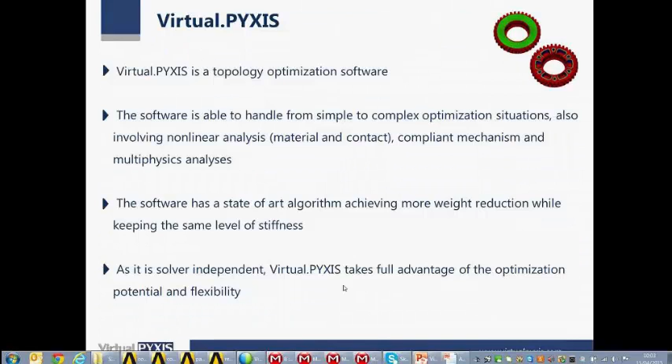As for where we've been working, we have an office here in Chicago, US, the place where I am. We also have an office in Hanover, Germany, and a relationship with Virtual CAE in Brazil, which is our subsidiary in South America.

Here in Hanover, our office is in a place called Wissenschaft Park, which is a technology park. And Chicago is inside the Illinois Institute of Technology, also a technology park.

We are also an ANSYS partner, so later I will send this presentation to you, which is not confidential. If you go to the ANSYS website, under software partners you can see that we are developing something ANSYS recognizes, something that gives value to ANSYS. So we are partners in this development together.

Let's talk a little about the main advantages of the software. In this presentation today I'm focused more on ANSYS, so that's why I say just ANSYS. In this case, we use the ANSYS solver during optimization cycles.

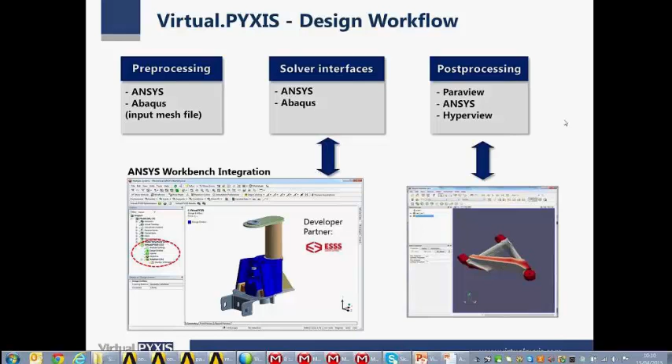So here are some models, just to understand a little bit more the applications of the software. Everything I show here is not confidential, so just to understand a little bit more.

Here is a Cummins model. It's a truck engine mount support. It's nice because when you start the optimization, you go from this extended design and get something like this at the end, also with the validation. I'm talking here about 23% weight reduction. The result of the topology optimization itself is like this one.

After that, of course, you have to go to the CAD again, and there are some ways to try to get shorter time to prepare from this part to the final part. For example, in ANSYS version 16, we have a module called SpaceClaim, now part of ANSYS. It's a CAD software for preparation for simulation and also post-processing, in this case for topology optimization. SpaceClaim takes this model and tries to get the final model as soon as possible, joining some surfaces and repairing some corners. It's a very nice tool, because most of the time people are complaining about getting this result to the CAD interpretation as a final result.

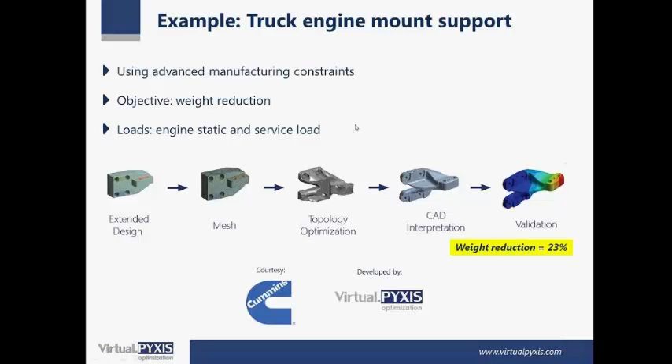Here's a different example, a gear model, showing symmetry—in this case rotation symmetry—and extrusion, using pattern repetition around the model. Here we use polymer, which most of the time we think is like cast steel or aluminum that can be optimized. It depends; it can also take care of injection molded models. In this case we are talking about polymer, working with all the loads normally acting on this gear. This is the final design, with 35% improvement compared to the baseline model.

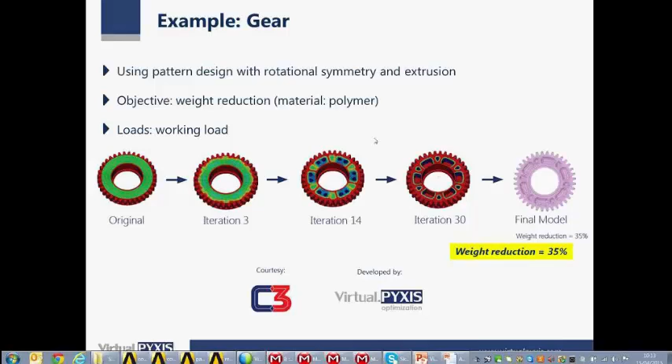Here's also a nice example from AGCO, which we worked together on. This is taking care of the nonlinearity of the situation, because this is an analysis of ROPS, the rollover protection simulation of this structure. This support comes in the front part. So we start from this and we get this. The idea is to try to get homogeneous reactions for all the loads.

That's important—most of the time you think optimization is just about weight reduction. But in this case, this is the original model, and from this model to the optimized model, we actually have more weight here. But with the optimization, we can distribute in a better way all the reactions for the loads, which is good for the attachment between this support and the transmission. So it's not always about weight reduction, but also solving a specific problem that can be very difficult to design by ourselves, even as expert designers or engineers.

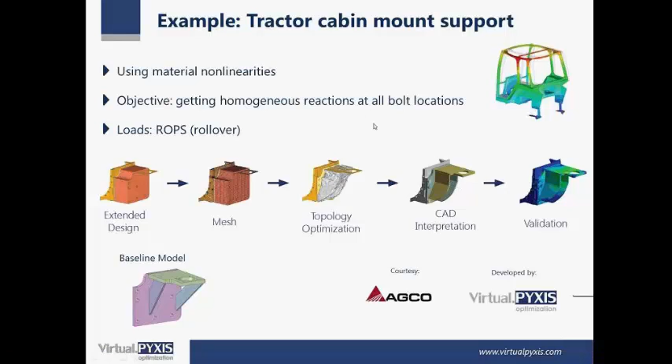Here's also a nice example from ThyssenKrupp. This is a model called the pinless project, where there is no pin on this assembly, just the con rod and the piston. In this case, we would like to control the situation. Most important for the optimization is, of course, compression and tension, but the tension load tries to displace this part to the left, and also this part to the right. So because they are trying to separate from each other under the tension load—going up and going down—the piston and con rod.

After the optimization with this new structure, it also works as a flexible mechanism. During the tension load, this part, instead of going to the right, goes to the left. This solves a problem, because there's a cylinder here, and if this part goes to the right it can be a huge problem about failure or something like that. So this is an important model also to talk about optimization.

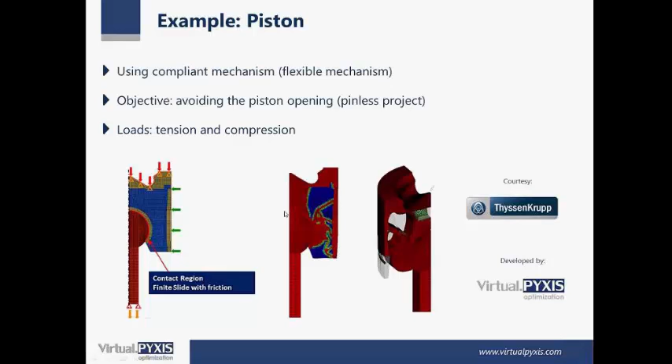Now I have some models to work with in ANSYS. The first model is for a nonlinear static analysis. This is a kind of model which is more or less the same size as a real model, with more or less the same loads as a real model.

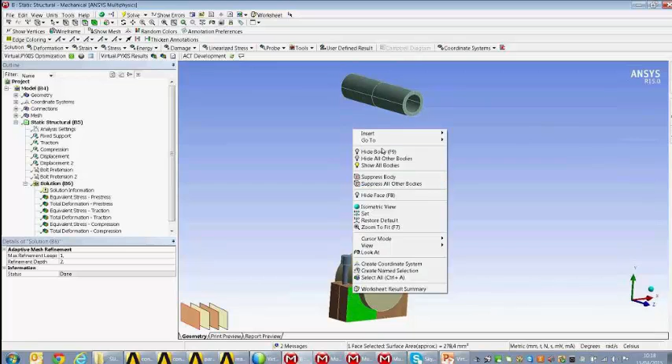Here we have an assembly of a con rod and cap. Here there's a pin, here is the bearing, and also here inside there are some screws which are tying together the cap and the con rod.

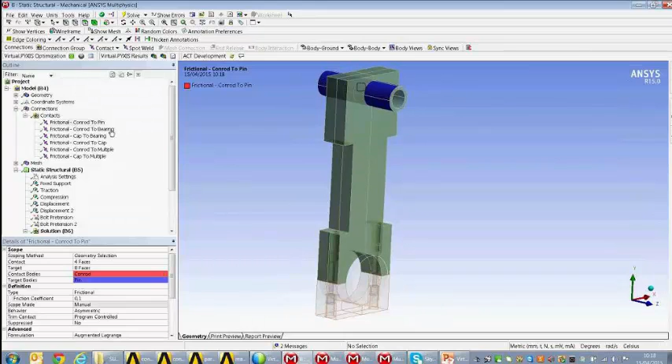Just to have an overview about this model, here we have the contact, for example the contact as a friction model. We are working here with 0.1 for the friction coefficient from con rod to pin. Also there's a contact, everything here is friction, just to summarize, using also every time 0.1 for friction coefficient. In this case, we are using the contact in between con rod and bearing.

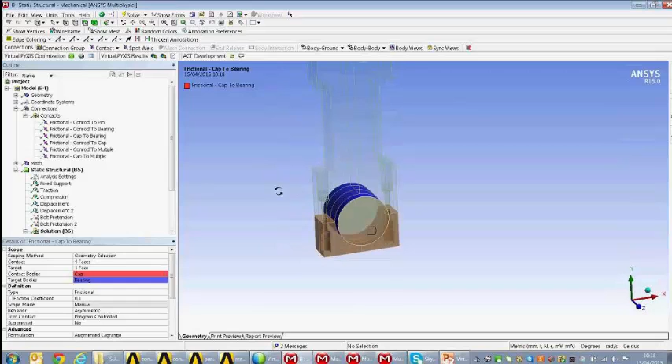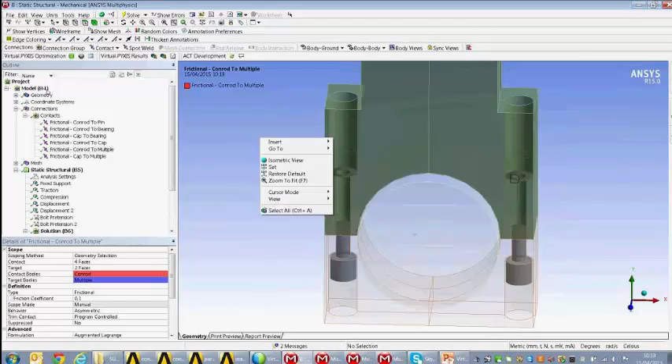There's also contact in the bearing and cap, and contact in between cap and the con rod, to prevent anything that happens in between these two parts. There's also a contact in this case, for example the screw to the con rod and the screw to the cap, internally to this part, to prevent the approximation of the head of the screw against the surface.

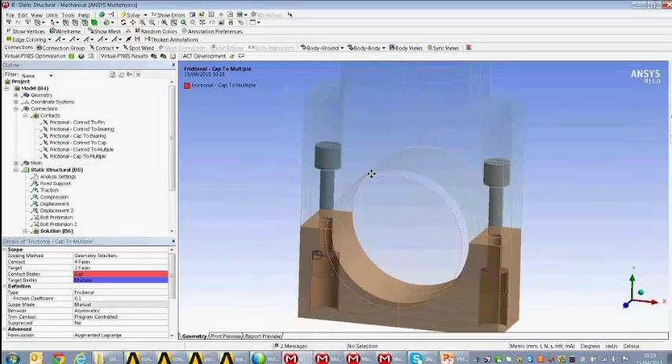So here is just to show the mesh of the model. This can be used - there is no restriction in ANSYS, or even perhaps in Abaqus, for the elements. Most elements you use during your structural analysis can be used here, even tetra or hexahedra elements, first order or second order.

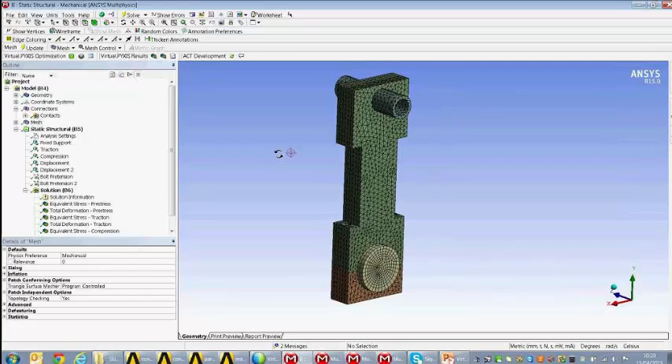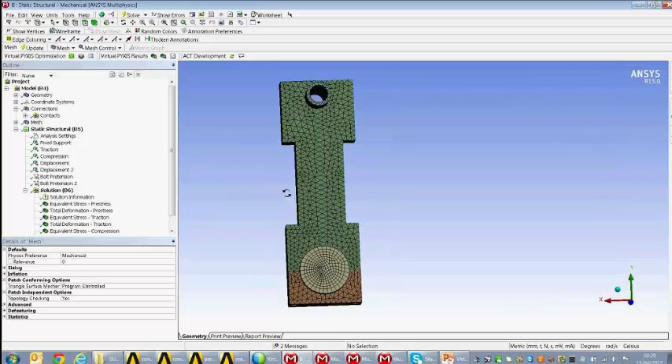For the optimization, it's the same idea as you use for a normal or standard simulation - the more elements you have, the better. Also, if you work with nonlinear or second order elements, you also get better optimization results.

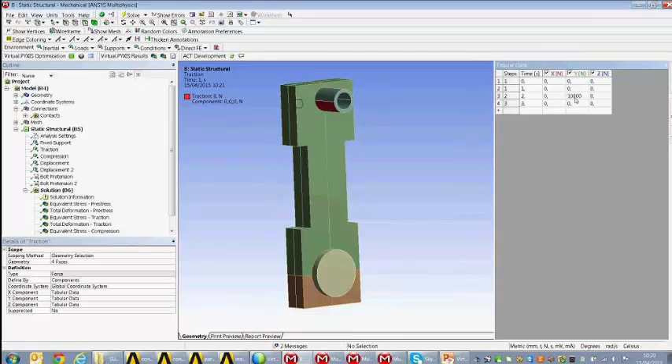So here in this case we have a situation of 3 load steps. The first load step is the case where we apply the pretension of your structure on both sides, and in the next steps you apply, for example, traction and compression loads. This case is compression, this case is traction load, and all the time applying in the pin, which more or less represents the contact in between pin and the piston. So here for compression, top part, and this part for traction load.

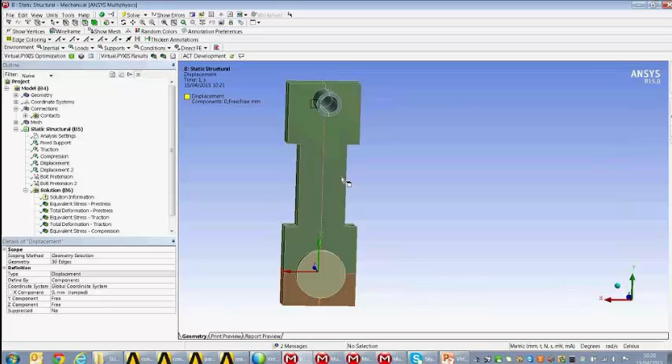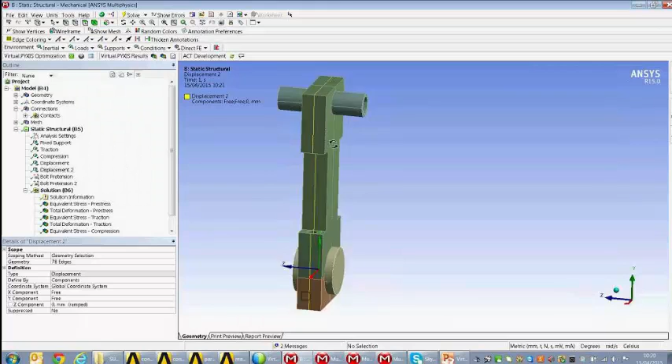Also, sometimes as the mesh is not 100% symmetric from both sides, and also sometimes to get an easier convergence of the model - in this case, as a symmetric model, we are just emphasizing the symmetry by controlling the displacement of the outside surface, which more or less divides the part in both parts from this plane and also from this plane. But this is more than the optimization - it's for more controlling the convergence of your nonlinear static model.

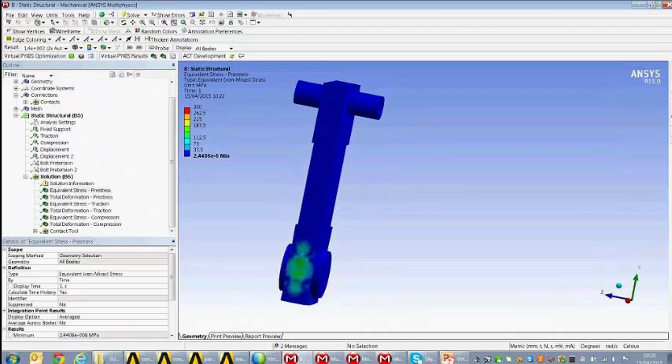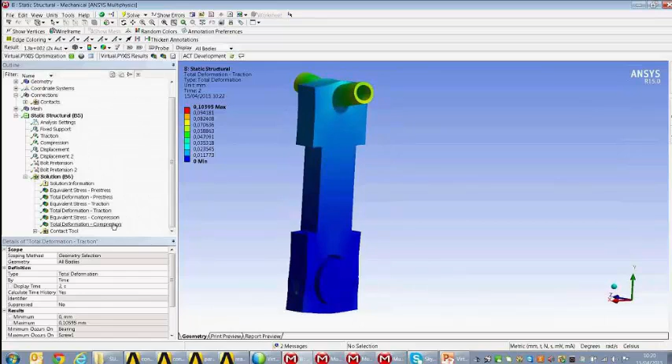And here we can see the results. For example, the pre-stress, which gives a higher stress on this region of the pretension. And also, for example, here you see the deformation in some scale - in this case we are using more or less 100 times more, to see how it works for the traction and how it works for the compression situation. And also here, for example, the stress for traction and the stress for compression.

So from here, now I can prepare the optimization model. When you are using, in this case, our software, you have just to go to ANSYS - perhaps who is working more with ANSYS ACT, which is the ANSYS Customization Tool. You have just to install your extension, a standard extension for that, and after that you just manage this extension, which in our case is Virtual.PYXIS.

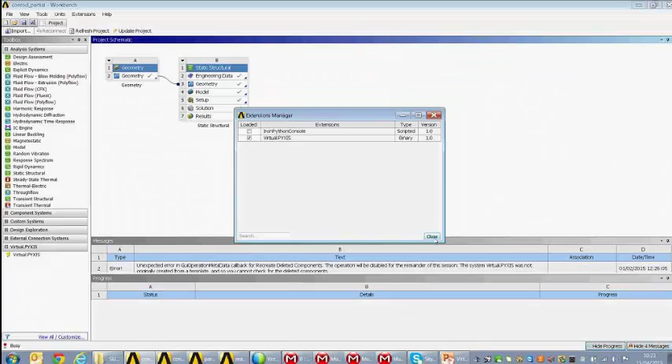When I check this part, you see here the optimization option. So you just go to drop this to your model analysis, and so, for example, here inside the ANSYS tree, now you see the preparation of your optimization.

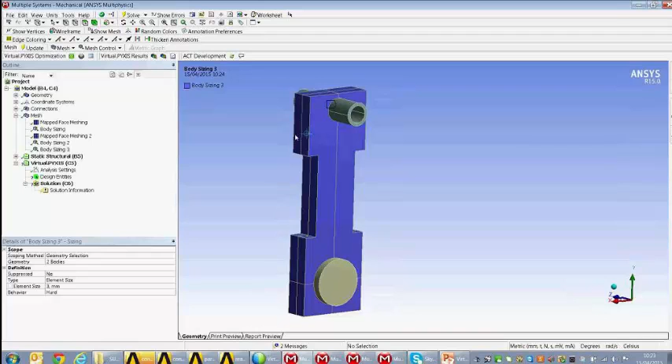For example, one recommendation that we normally give is that we see the element size of the part which you are trying to optimize. Here, we are enforcing 3 millimeters as element size. So in this case, you used to recommend 2 times as a minimal member or minimal radius for the optimization creation. Like, for example, the software - you control these minimal members as 2 times of the element size.

And also here you can see more possibilities of material law, filtering techniques, and some more controlling options. We have documentation where everything is well explained.

Something important when you are running the optimization: for example, here we can also use ParaView, as I showed you before, as a post-processor. You can also export the STL model here inside ANSYS, taking the last result of the optimization and creating this STL model inside the directory you're running.

And also you can use this MPI license of ANSYS. This is not the parallel processing of the optimization, but the parallel processing of ANSYS in this case. Since we're taking sometimes 20, 30, or 40 iterations, the time for the optimization itself is more or less 1%, or just a little bit more. So most of the time is ANSYS processing, and with this parallel processing we can speed up the solution using, in this case, 4 processors.

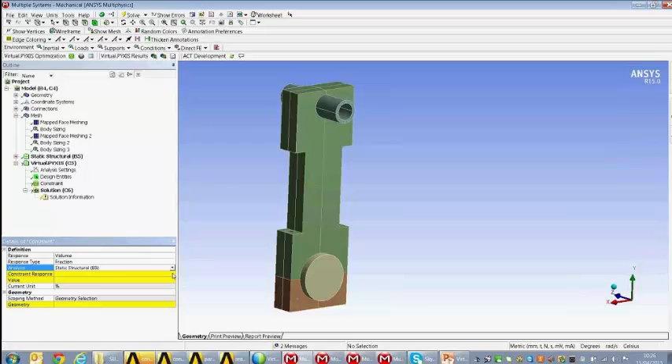Also, in this case, you want to control, for example, the volume of your structure, using the static structure analysis we have done before. And less or equal, for example, I want to reduce 65%. So I'm saying I want to keep 35% of the optimized model compared to the initial model.

So this is the part of the optimized model: you have just 35% of the initial model, again for these two, conrod and cap.

In this case, I need to create a load combination, because if you go back to the load history, the first load step is the bolt pretension, and the second and third load steps are related to traction and compression loads. So what we do here is create, for example, two lines: the second step, which is traction, and we can have, for example, weight. Weight here is not related to the structure, but the weight of the strain energy for the load step, second and third load step.

So here you can combine as many load steps as you have, and it's important because, for example, the compression and traction loads produce different strain energy in your model, and they don't act at the same time. If the loads acted at the same time, you wouldn't need two lines, just one. But here we're talking about different load steps, different times, so we have to create this load combination.

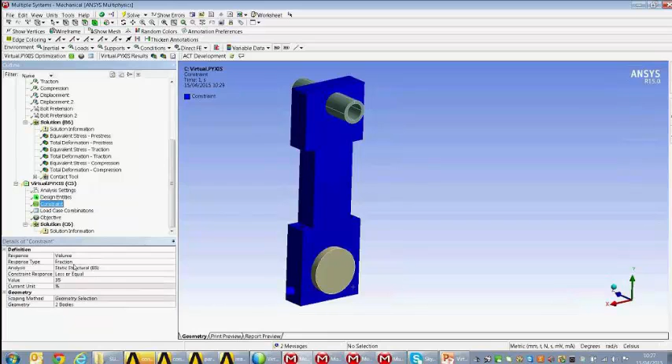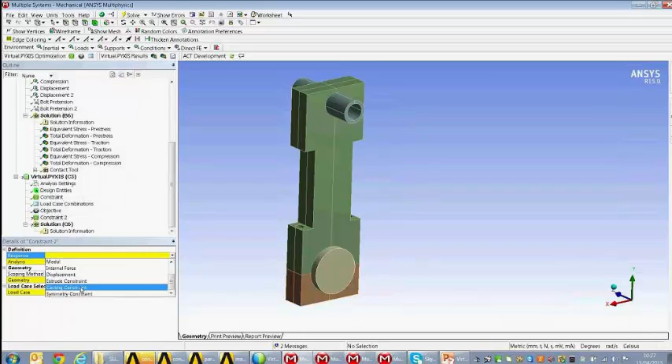Just to go a little bit more in detail about the constraint: here I also constrain the volume, but you can also control more things, including manufacturing constraints. For example, casting constraints, where you can prevent certain opening directions, plus more things about the procedure itself for the manufacturer. Everything can also be controlled here under the constraint - in this case, not volume but manufacturing constraint.

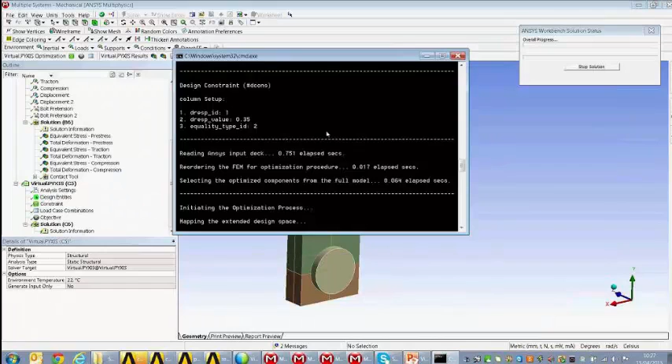So if everything is fine, I can start the solution here. Now you see that the optimizer will call ANSYS, running ANSYS, and also calling the MPI license for this case.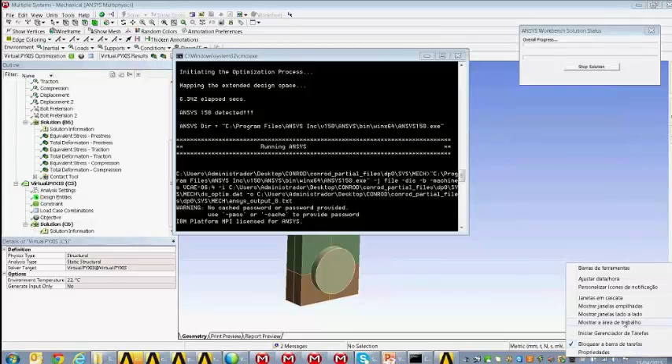So when I go to the task manager of my model, here you see, for example, some ANSYS procedure running during the analysis. It takes some time to solve this model.

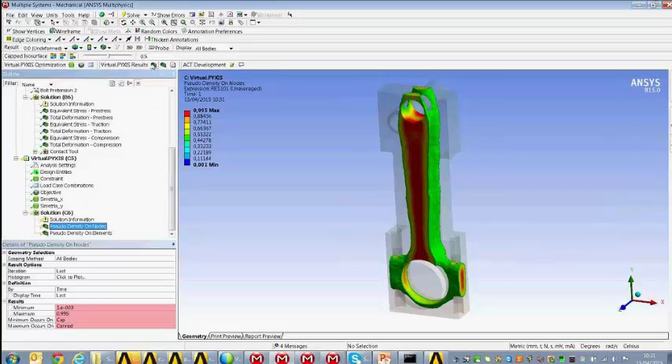I have prepared here the final result for this situation. So after we get that solution, you just go to the node and element density plotting, and in this case I'm plotting the node results, so you can have a nice view of your model.

For example, what you have in the beginning and what you have at the end - it's a completely different situation. Here the software tries to keep as much material as possible from pressure on both sides, and also there's some material around the screw, because there's energy accumulating there. So it's a nice result overall.

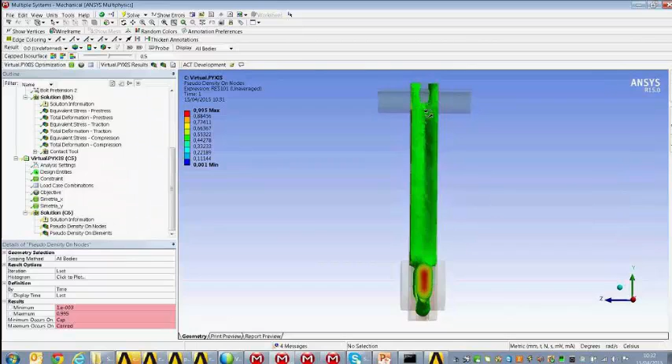Also here you could use this STL, which is inside the directory of ANSYS, as I told you before during the presentation, to go to the CAD and have this part as another model. Here it's nice to see that most of the energy is not in the middle of the upper part of the conrod, but in places of contact, giving different results. So here you can see some material which is removed, and this case could also be controlled by, for example, using casting on the Z direction to prevent this material going too deep, like here.

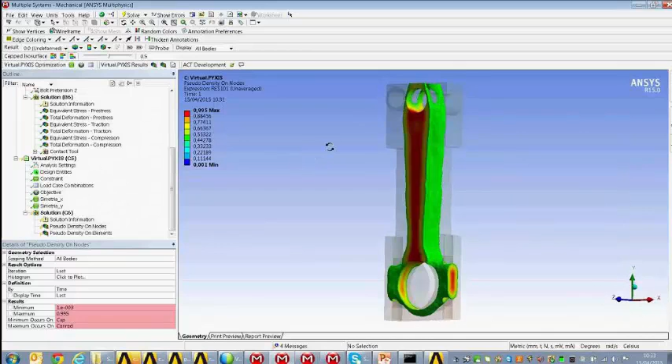Now I will show a different model. As I told you, it's for a frequency situation. This is a model from Cummins, which is non-confidential, so we can use it to show it. Just to have an overview of what we did first, let me show you here.

By the ANSYS integration model or project, we have here the static structure analysis for generating the pretension of the bolts. After that, we use the result from this pretension static structure in a modal analysis to optimize the vibration situation. So when you go back to the tree, you see the static structure, and the modal analysis calling the static structure.

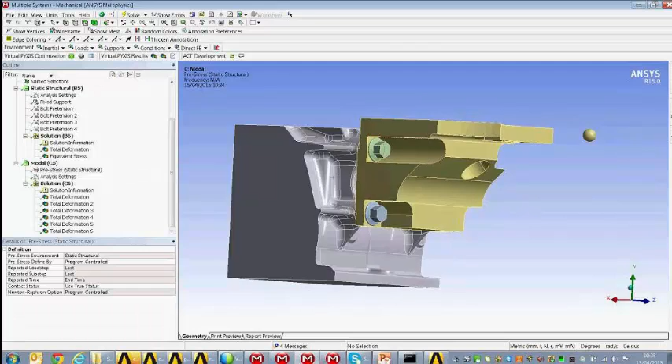So why is it important? Sometimes when you're using structures that have pretension or loads acting during the static analysis, you see there is a difference when you compare the results of the modal analysis. For example, the pretension can add additional stiffness to your model. If you don't consider this stiffness, you might optimize the vibration but get a different eigenvalue. For example, without pretension you might have 100 Hz; with pretension you get a different value, because when you change the stiffness, you also change the overall eigenvalue, which is the frequency of the model. So it's important sometimes to consider this pre-stress model, and there's no limitation in our case.

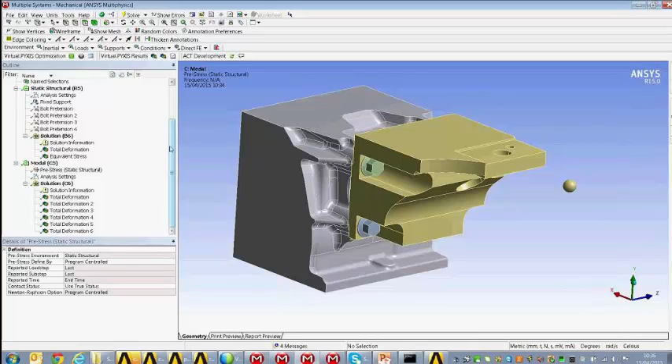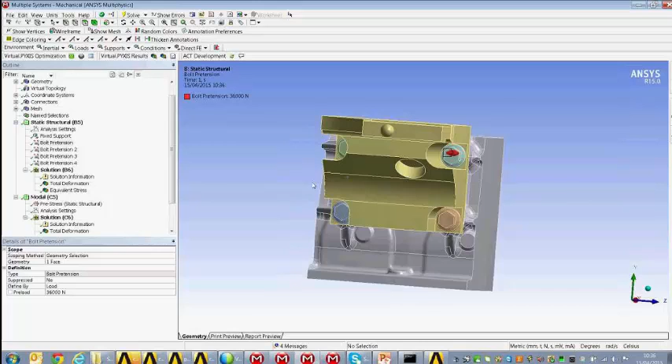Just to give an overview of the model: here we have restrictions for this part, which represents the cylinder, the engine block. We have 4 pretensions for all the bolt loads. The values here are just examples, we're just changing the values. Also, I have a point mass here — in this case we're using 10 kilos to represent, for example, an unbalanced mass connecting to this part.

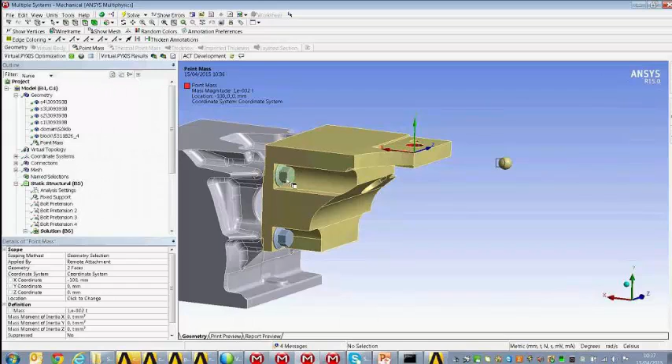So the idea here, as I told you before, is to have in the first analysis the static structure with the pretension, and after that we try to optimize the vibration modes of this part as an extended design to get the best result for the optimization.

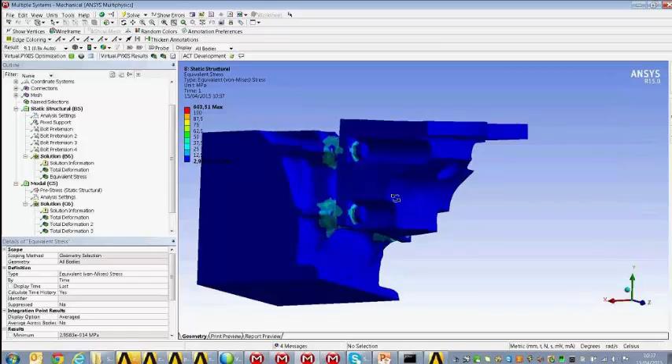So when you see here the results of the static pre-stressed analysis, you see some stress around these screws and also some deformation.

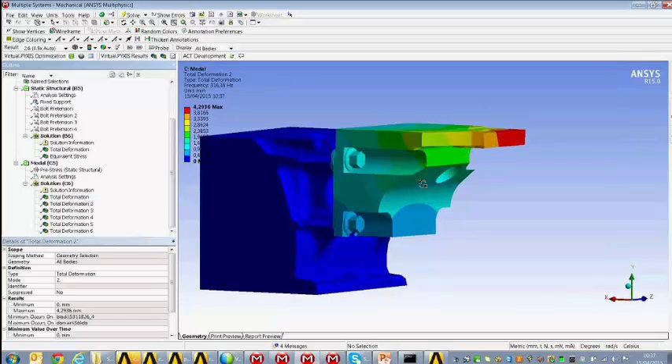And after that you have, for example, the vibration modes. The first vibration mode is trying to move this part up and down, and the other vibration modes show bending and torsion modes.

Going back to the tree, in this case we start a new topology optimization analysis. Now you see here, if, for example, you want to see which element size we are using — in this case we have 5 millimeters for the support. We use, for example, 2 times 10 millimeters for the minimum member size. As I showed you before, you can also control the STL generation and parallel processing of ANSYS, for example.

Design entities, in this case again the support. For example, I want to control the first constraint, the volume of my model, as a fraction of the model, less than or equal to — in this case, for example, 35% of the final result, having 35% of the initial model for this part again.

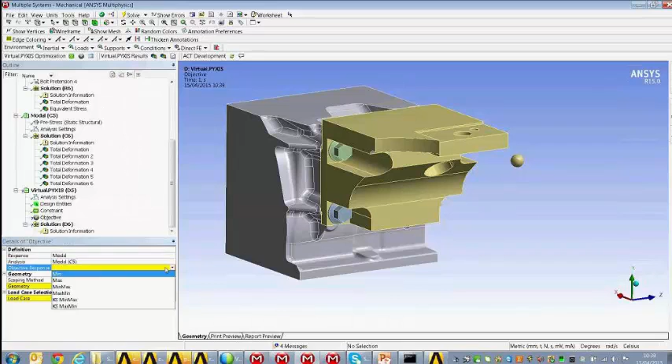Now I can control, for example, which frequency I want to use. I see 6 here because it was also from the analysis settings of the modal analysis, where I'm plotting 6 modes for my case. It can be more than 6, 10, or 15. Also here, I can try to prevent what we call mode tracking.

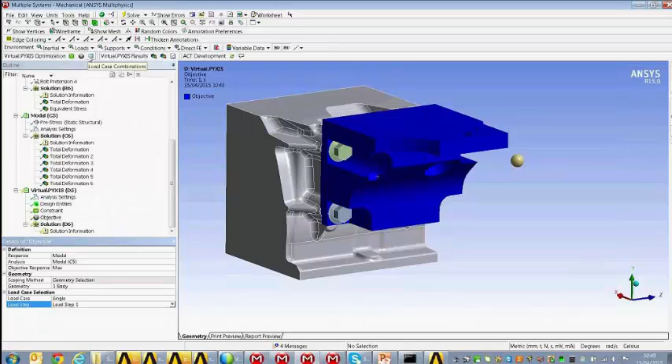Like, for example, when the modes are trying to cross each other, in this case what you have to do is create a load combination. Line by line, you call, for example, first, second, third mode. Here, instead of using the single load step, use the combination. So you try to see not just the first mode going up and down, but also other modes that can affect it, like the second mode vibration becoming the first mode, and the first mode becoming the second mode - this is mode crossing.

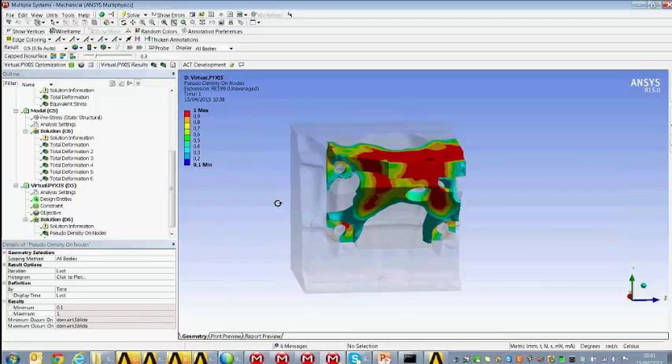So, for example, here everything's fine. You can just start the solution and try to get less time. Here I see some results that we have. The mesh is not very fine to get a nice result, but here you can see a tendency of your model.

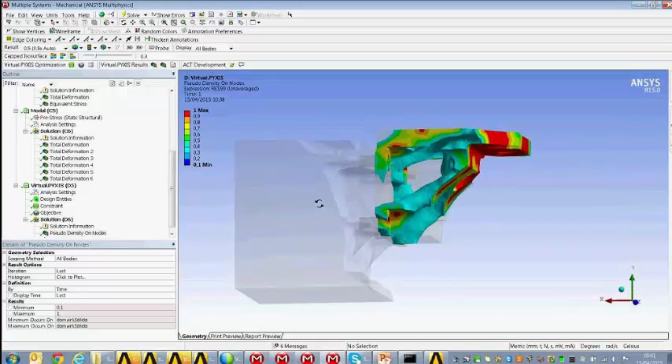What we recommend most of the time is that you don't use any manufacturing constraint for the first result, as we have here, and you see what's the tendency of your model - for example, which situation I can use better for manufacturing controlling. We have a lot of papers and materials, and later we can share them with you if you want, comparing the situation where I don't have any manufacturing constraint, and how that influences the results, talking about, for example, frequency or stiffness. This is the first situation.

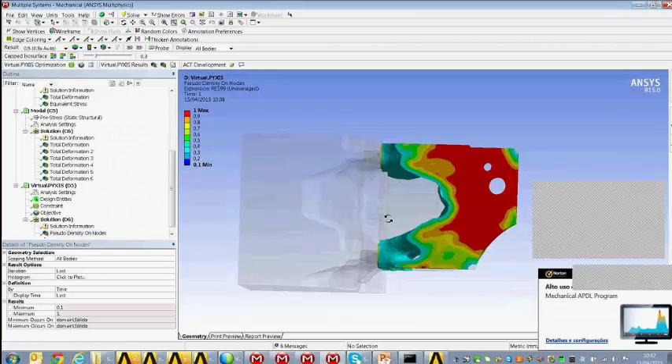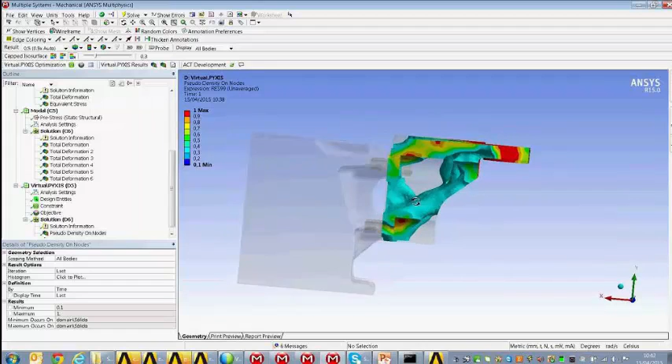The second situation, you try to enforce some manufacturing constraint, like for example going in this direction onto the top. So again, you can control this. It's not a problem, but it's recommended that every time during the optimization, you try to get a result first without any manufacturing constraint. After that, you try to match the best design that you are getting to the manufacturing. So here is, as I told you, the final result.

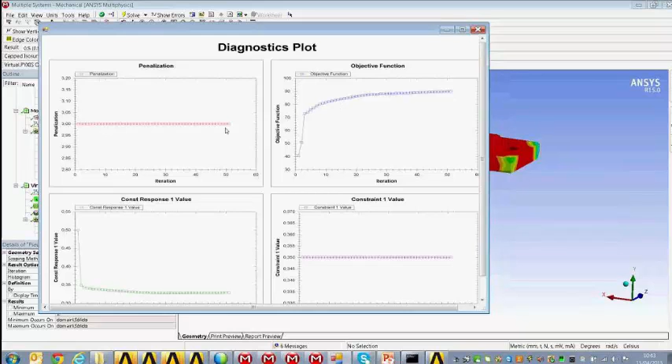Let me see, I can have here more or less the objective function. In this case, we are maximizing the eigenvalue, or the value of the frequency, of my model. So this is the first mode going up to this part. You can also have some plotting to get a better understanding of your model.

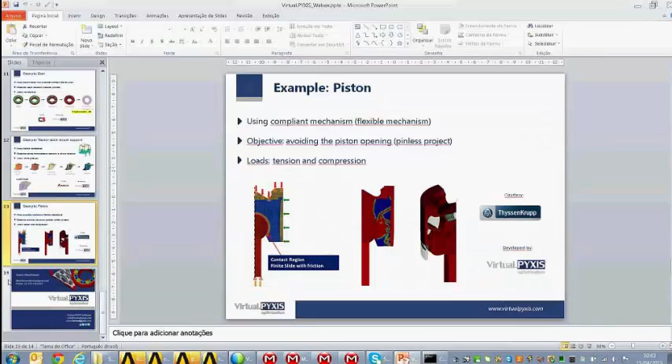Yes, I think this is everything that I would like to say. This is just the last part.

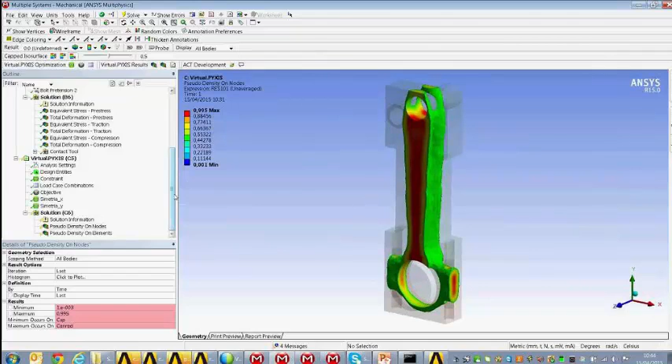There's a question from Thomas, asking what is the nonlinearity of this model - I think he is talking about this first situation. About nonlinearity, you have many situations. For example, load nonlinearity, where you apply loads step by step in different load steps. Or you have geometry nonlinearity, when your geometry has a lot of deformation. You have material nonlinearity, and also a part of the analysis called contact nonlinearity.

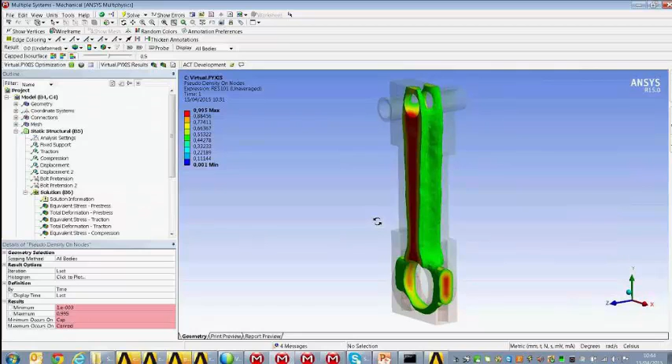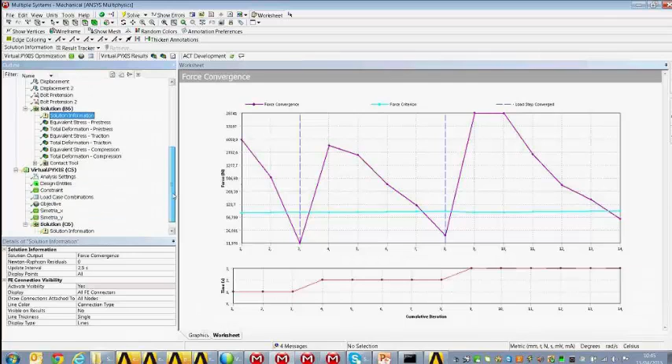So in this case, we are using contact nonlinearity because it's a friction contact. When you look at the convergence, for example the Newton-Raphson convergence, you see that the model is going to a nonlinear situation of results. So that's the answer for this - this is a nonlinear contact model.

Yes, also the friction and the pretension can be a load step, because there is both nonlinear contact and nonlinear load behavior, since we created 3 load steps: first, screw pretension; second, traction; and third, the compression.

Let me see what we have more here. Yes, there's a question from Ellie: how can you extract the result geometry?

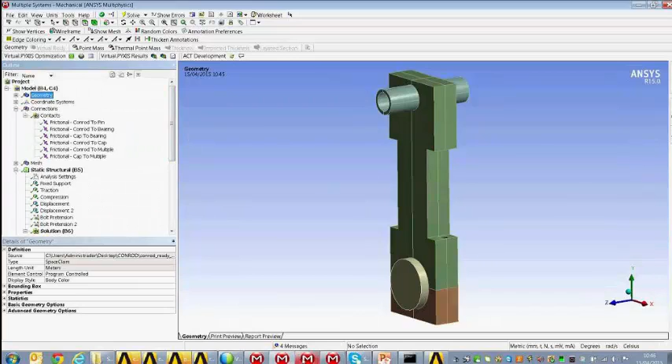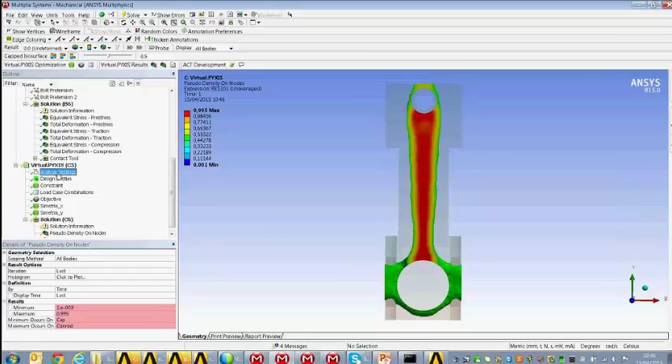So, for example, there are 2 ways you can get the final result from this result, like this one. When you run the ANSYS analysis, you have a structure of files and directories. When you give the software the possibility to say yes, for example, to export an STL file, when you go to these directories, you see a lot of files, and also the STL file of the final result like this one. This is one way, inside ANSYS.

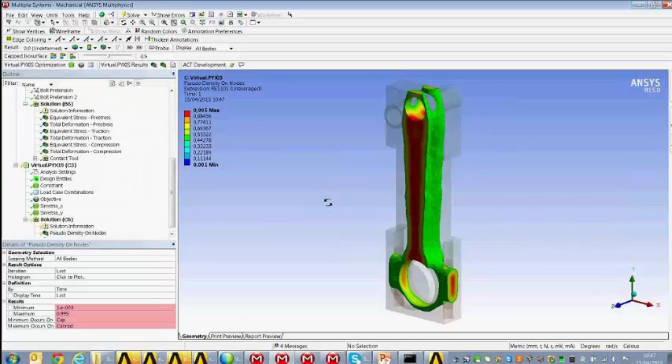But you can also use ParaView to complete this situation. For example, let me take this part, like for example this one.

So ParaView is an open source and free code, and it's very powerful. I have been using this software very much.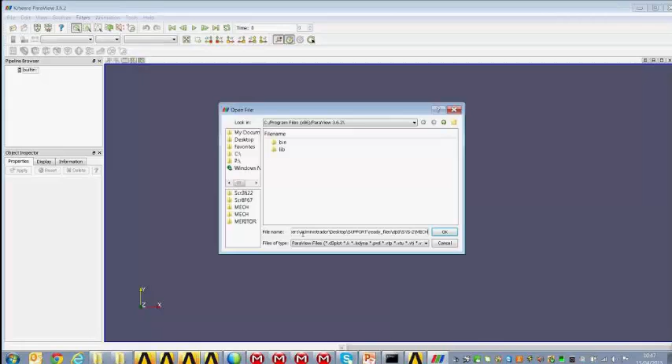It's very powerful for optimization, and we created some routines here to apply the geometry to get this smooth surface. So for example, here you go to the last step,

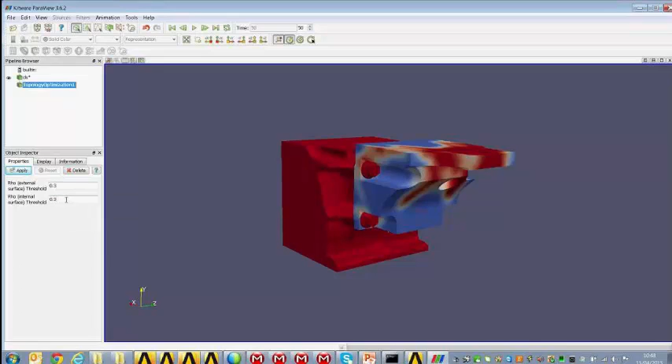and you create some filters. For example, I'm using 0.3 for filtering of the result. So you see more or less what we are seeing in ANSYS.

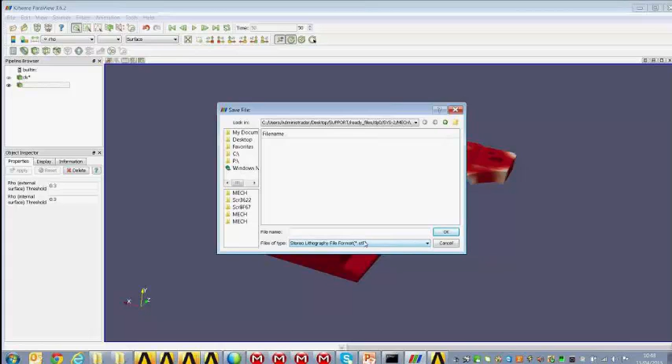From ANSYS you get the STL directory from the directory structure, and here from ParaView you just go to save data, and you can export the STL format of this final result.

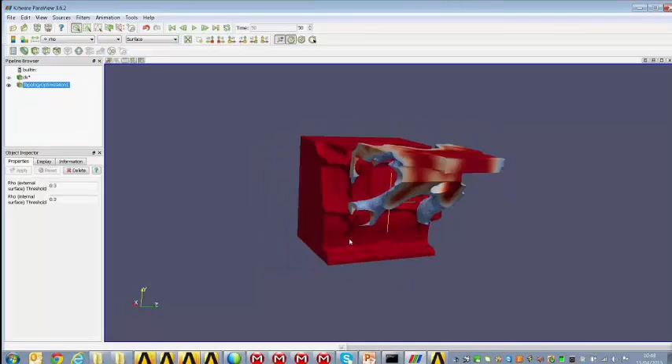So as a CAD user, you can take this STL result and go to SolidWorks or Inventor or any software used for CAD and try to rebuild this as a final result, or even SpaceClaim

from ANSYS, which is a very nice tool. It's an add-on module. You can add it, it's integrated into the ANSYS Workbench project, and you can take the results from this to a better understanding of your model.

There's also a question about how the optimizers communicate with the ANSYS solver. Yes, for example, in this case, everything runs

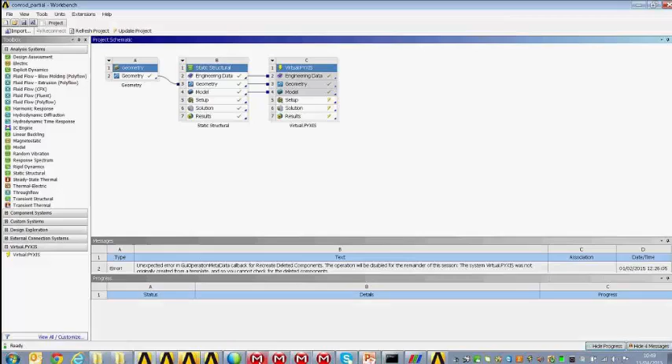from the batch. Like in this case, I'm still running the model. So we prepare everything here with the ANSYS tree. That's nice because you don't really need to know a new software GUI, you just need to understand a little bit better how the optimization is prepared.

But after preparing this situation, we run the software, and ANSYS will take for every condition. There is a kind of automatic batching analysis, where for every iteration we are running ANSYS and getting the results into Virtual.PYXIS, then going back to ANSYS.

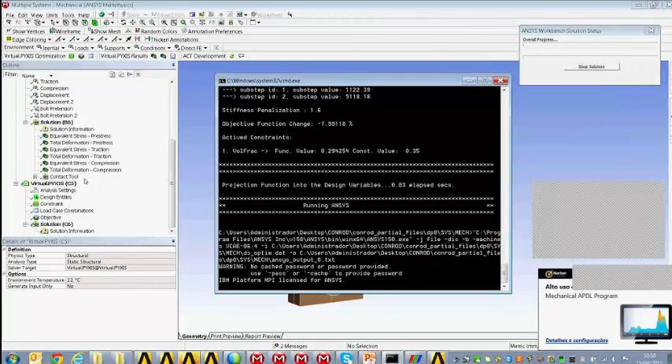So everything is automatic. There's not much work to be done here, it's just to see the result afterward with the user. It's like a kind of loop, Virtual.PYXIS working together with ANSYS and calling this in batch.

Most of the people are asking about some paper also. For sure I can share that with you.

Ellie is also asking about the difference between max, min, and KS max, min. I will try to get our developer here, I think he can answer in a better way. So just keep this last question, Ellie, I will try to answer you, and here also my people are helping.

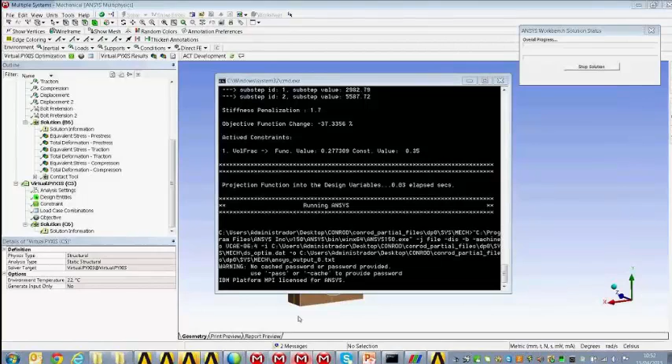The KS is the Kreisselmeier-Steinhauser function. It's a kind of exponential formulation of your model, a specific situation trying to get a better solution when you see that your modes are crossing each other. So when you go to the objective function, if you see there's a possibility of crossing modes, you can use this KS to prevent this crossing mode, which is the Kreisselmeier-Steinhauser function exponential formulation.

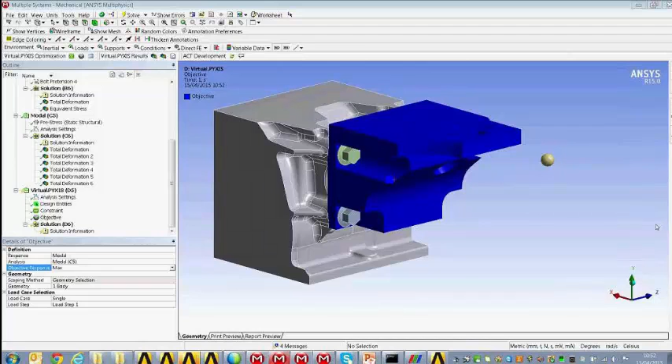Yes, we can use, for example, high performance computing here. There's no problem.

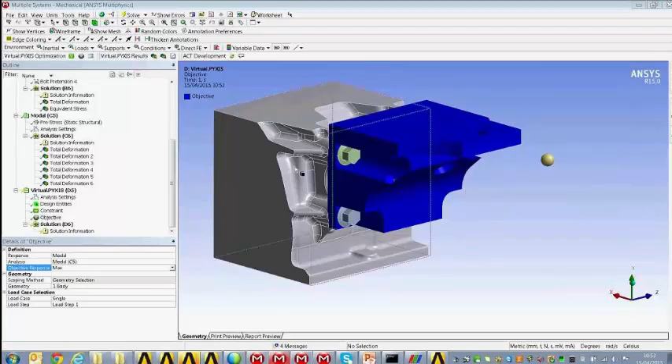We can use SpaceClaim. You can, for example, get the STL result from ANSYS or by generating it in ParaView, and after that we can use SpaceClaim.

Unfortunately, I don't have this model, but for sure we will try to prepare a new WebEx because this is brand new for SpaceClaim version 16, and we will try to show you this situation and how to get these results into a better CAD model.

So the answer is, we are using SpaceClaim to take the STL result.

Ellie is also asking about the checkerboard. Ellie, you can address this answer to our developers? For sure, they will answer you in a better way.

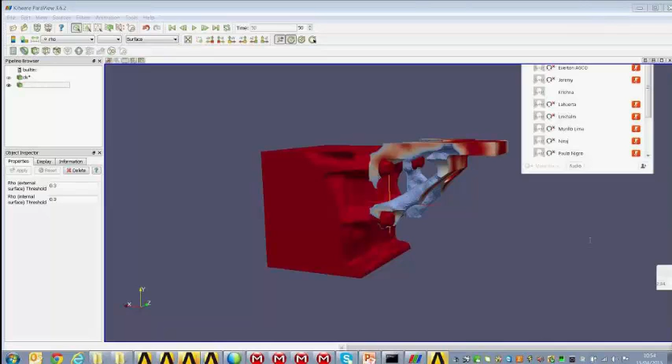Also, Jeremy is asking if it's possible to prepare a batch locally and send it to the server. Yes, I think I also have to give this information to the development team, but I'm sure there is no problem about this.